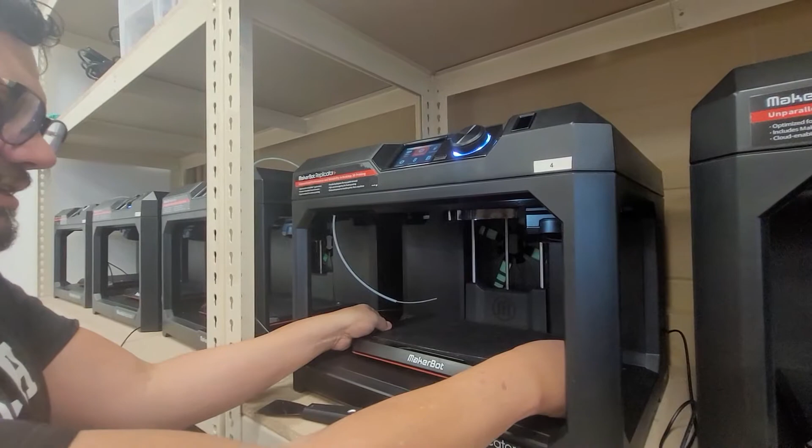This is the build plate for the MakerBot. It's pretty neat how you can just detach it, making it easy to bring out to a different surface and clean out once the print is finished. Let's review that process.

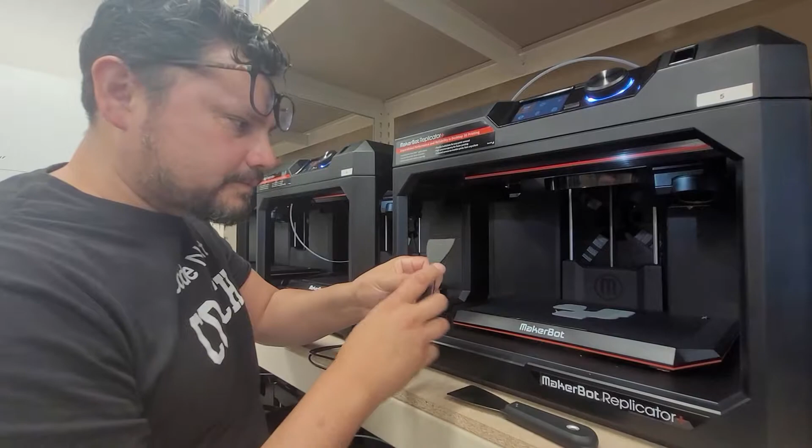As you can see, there's already a failed print here that we're going to remove. We use spatulas, there are different kinds you can use, and it's a little bit of wiggling that's involved. If the plastic one doesn't give, use the metallic one and nudge it up a bit, and once you get one corner up, it's easy to get the rest off.

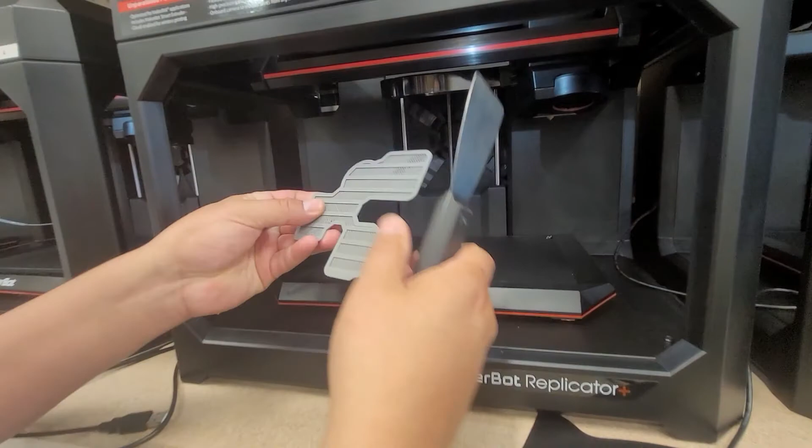There are always little artifacts left, so make sure those are clean. This is an important step to do before the next person can print. You want to always clean off your plate and get it ready.

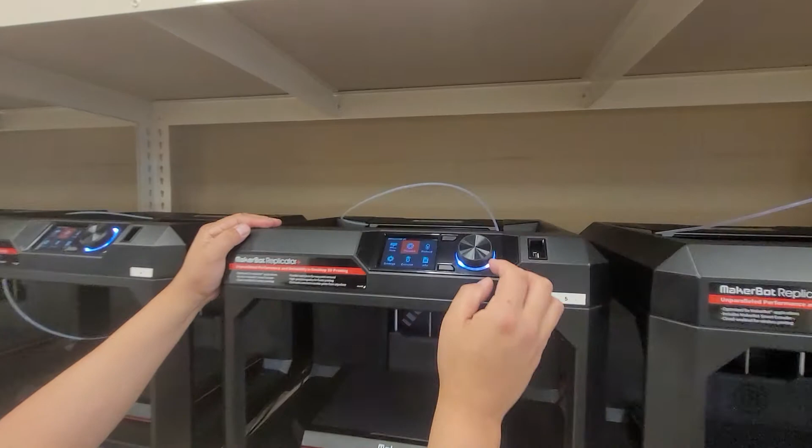Now let's remove the filament and replace it with a different roll. Up here, if it's on, you can see one of the options is filament. I select that and press the wheel. Since there's already material in there and it's pretty much stuck inside, I click unload filament.

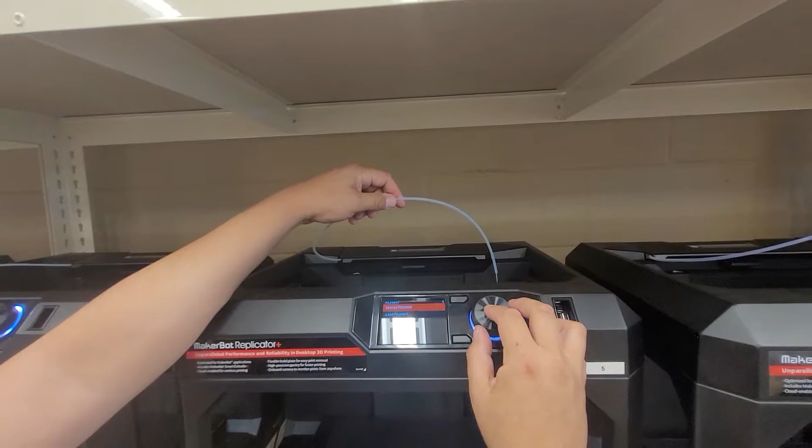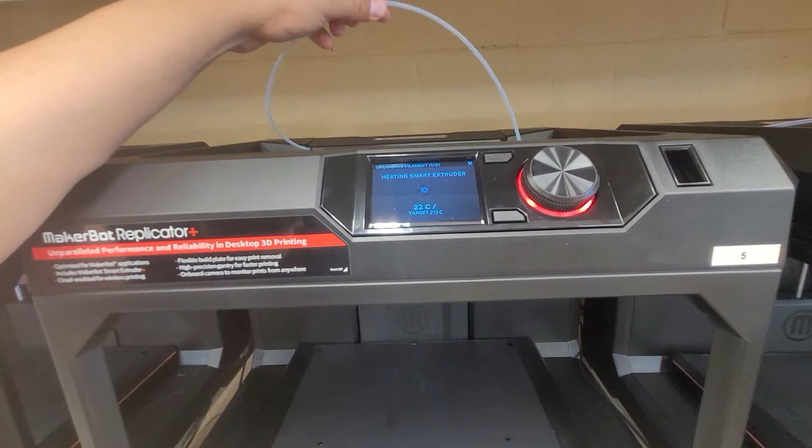It's going to hit the target temperature of 215 Celsius. Right now it's rising to that point, and once it gets there, I'll be able to remove it, unspool it, and retract it. There's a motor inside that handles that for us, so don't worry about it.

The material we're using is PLA, a non-toxic polymer that basically all the machines here should be using. PLA is pretty standard, one of the cheaper ones, and it's good for classrooms, so stick with that one.

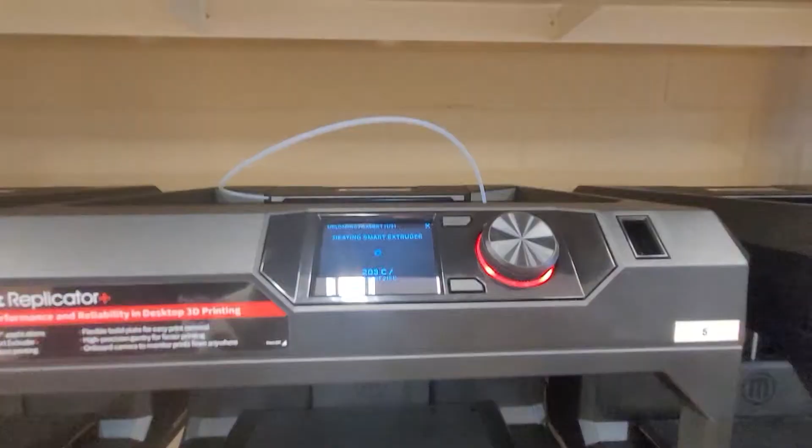Okay, it looks like it's getting ready to hit the target. It'll soon start retracting on its own. And there we go, just like that — it just spits it out. It's hot enough to remove.

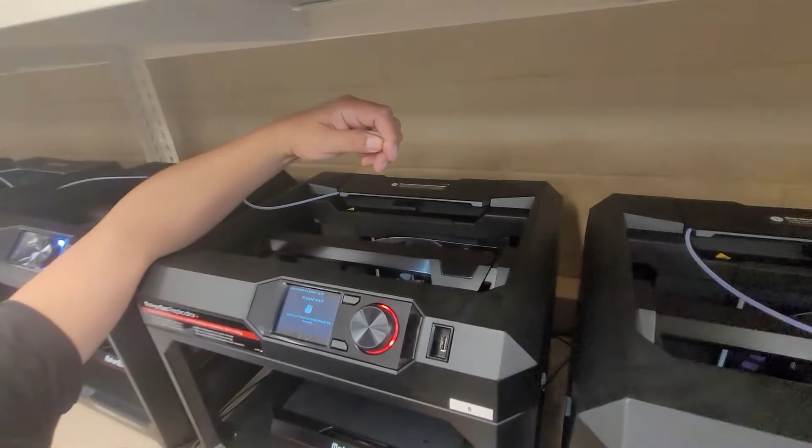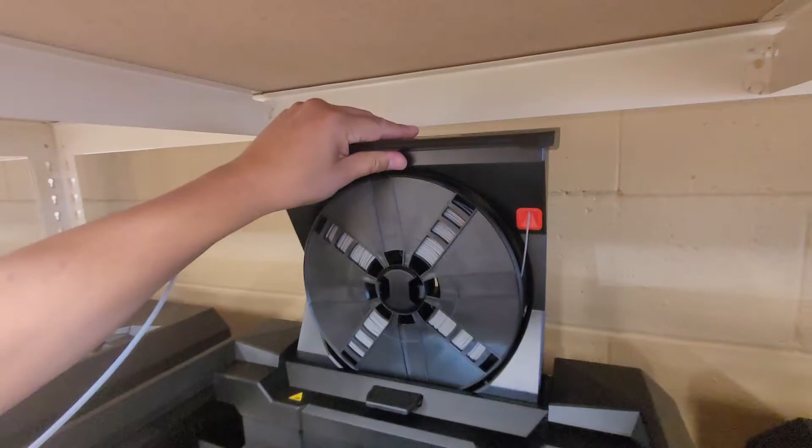Very easily comes out. The next stage is to actually change the spool. Back here is where it lives. Just take this thing down and hold it all the way until it clicks in place, because if you don't, it might fall down, make a lot of noise, and could break.

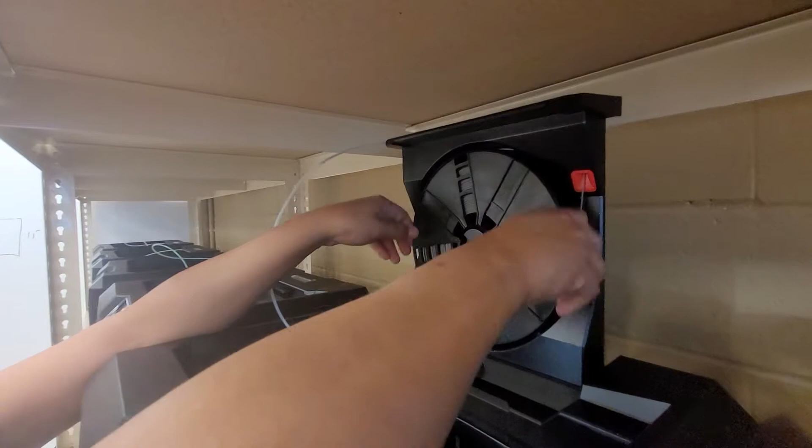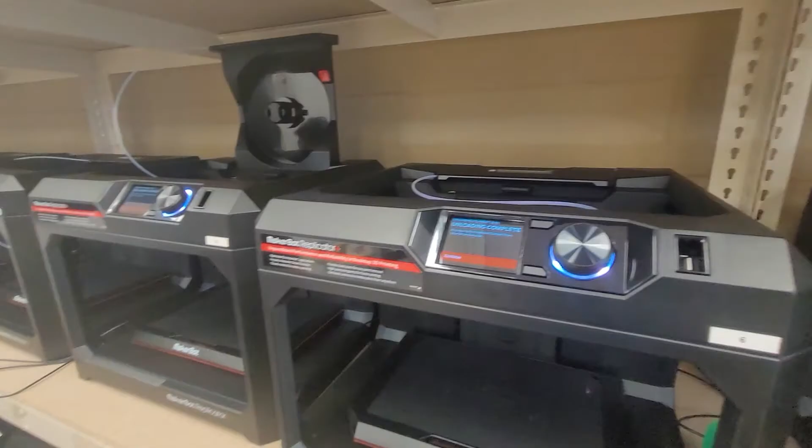Now you can basically spool it back like this and remove it — and maybe pick a different color. Where do we have colors? Okay, once you get it ready to spool, you're just going to feed it through here.

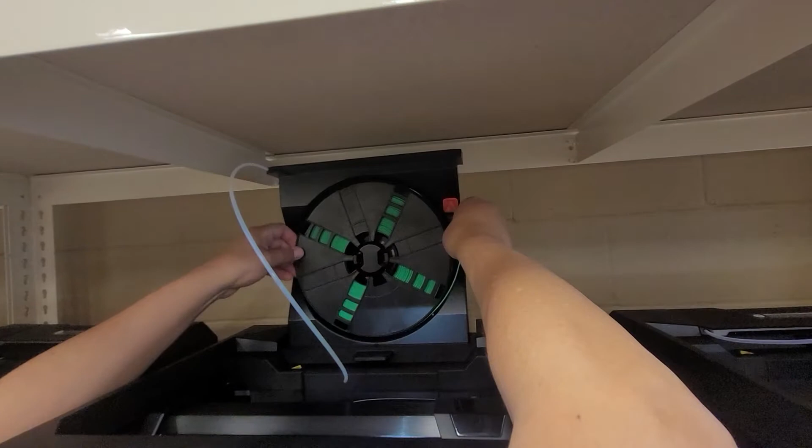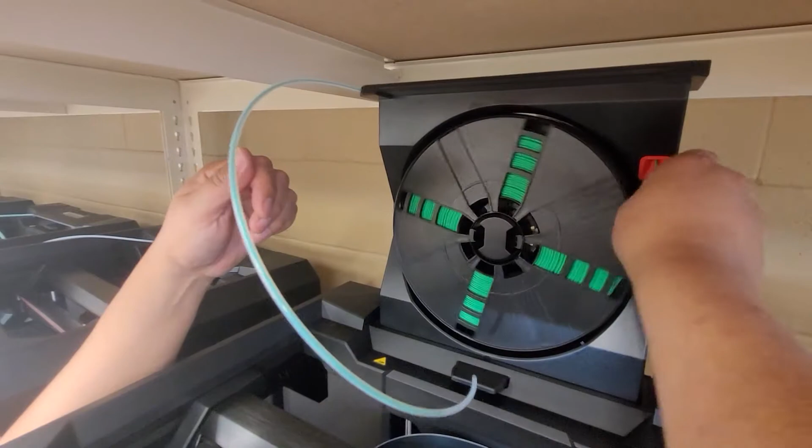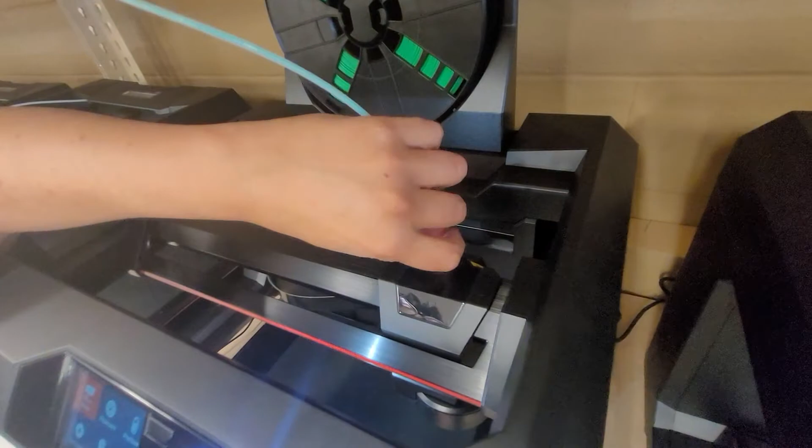So it comes out through this tube. Okay, that's what you want — a little tail that you can insert over here. Okay, just like that. Now it's not really spooled in there.

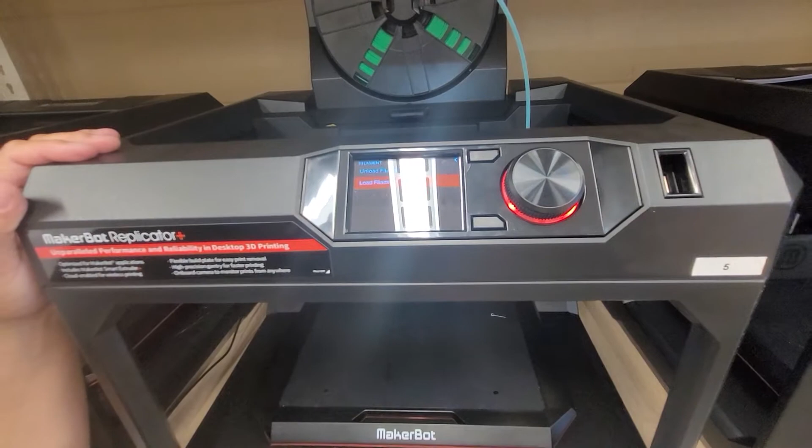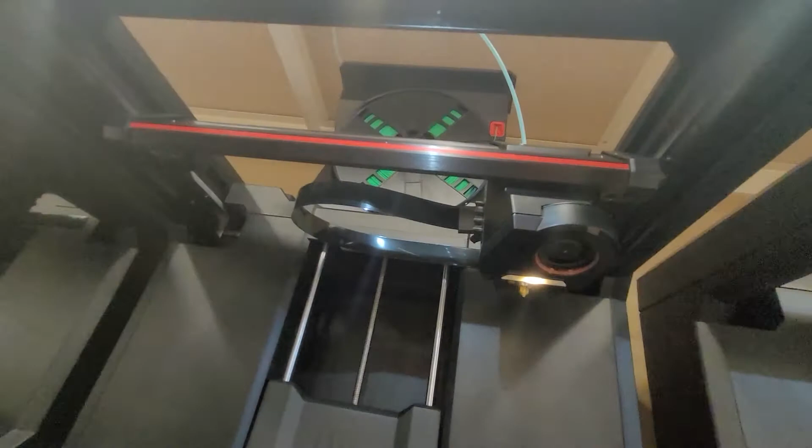We've got to go back to filament and click load. Again, it goes through the same song and dance, heats up to the target, and then starts spooling it through. At the end, you'll see material ooze out of there — that's when you know the filament has been successfully inserted and spooled.

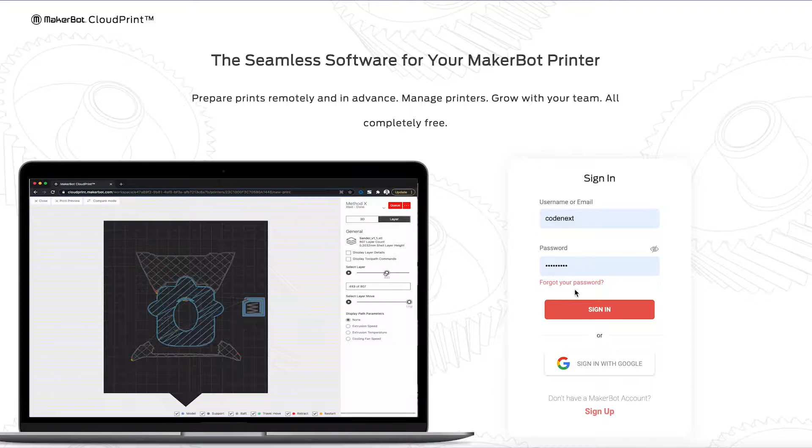We use MakerBot Cloud Print to manage our 3D printers, send jobs to them, and monitor the workspace. So we're going to sign in here with MakerBot. Okay, so this is the workspace, and here are all the printers that have been added to it.

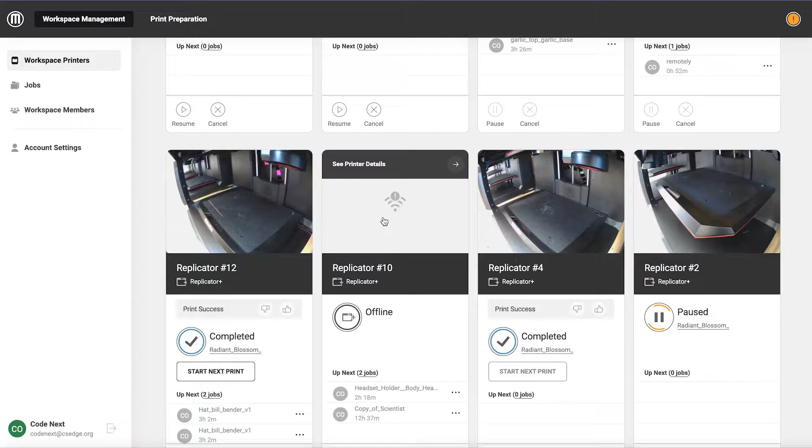There are some warnings here, so you'll see those if there are issues. All the different printers are listed here with their current status, and you see an image. This one appears to be offline. Some have had other issues, like out of material or filament slips. You can also see the ones that are finished.

Right now, all the build plates are clear, so there's nothing to actually see on them. But once a job is completed, you should approve it or say it was successful, and then it'll know it's been cleared from the queue. This one could start its next job — that could be done like that.

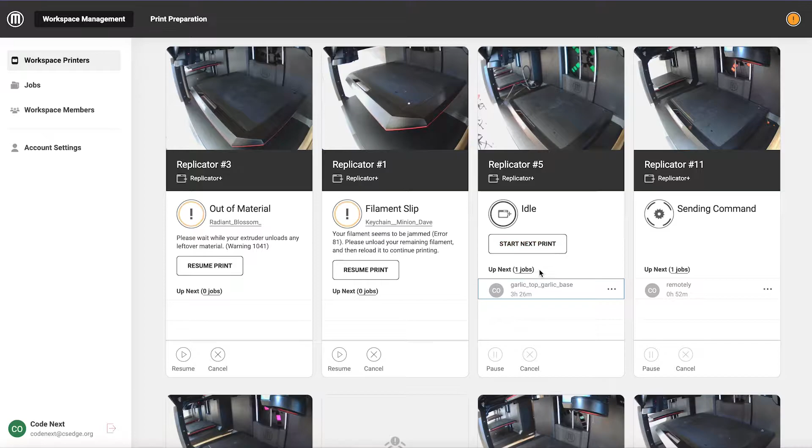And start print, and it'll begin warming up and do its thing. This is just a quick way to see what's happening throughout all the printers, and it also allows you to manage some of the members — who's going to have access to this dashboard.

You can add members by email, and you can see previous jobs and a few other things.

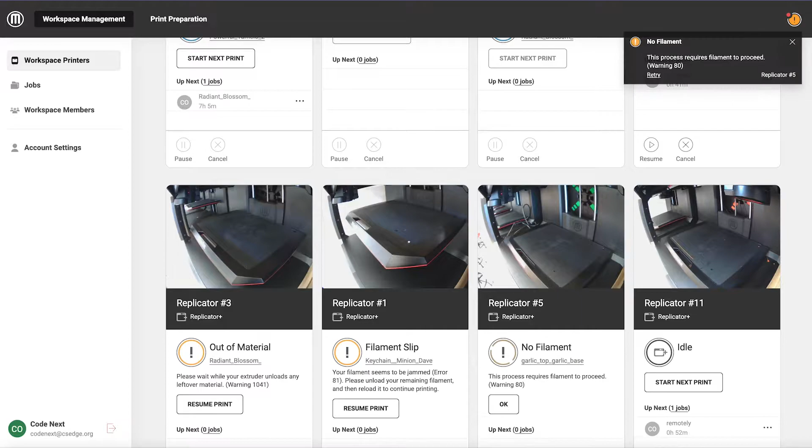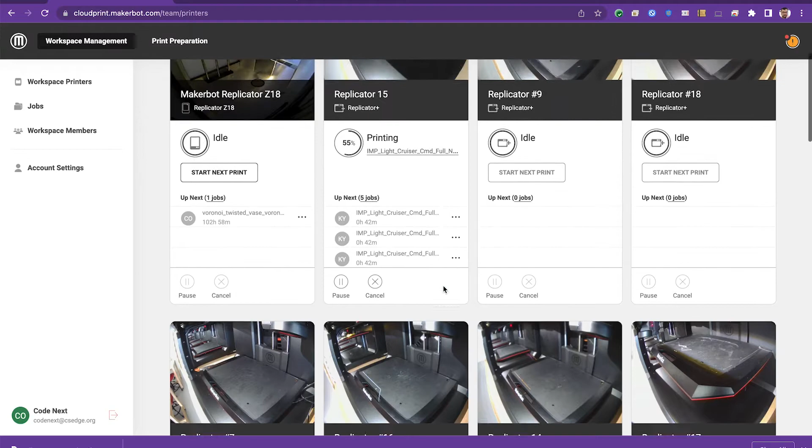Okay, next let's add a print job to one of these printers. That means we have to find the 3D model file to send, slice it up, put in all the settings, and get it ready to print. Then we can start the print job directly from this Cloud Print interface.

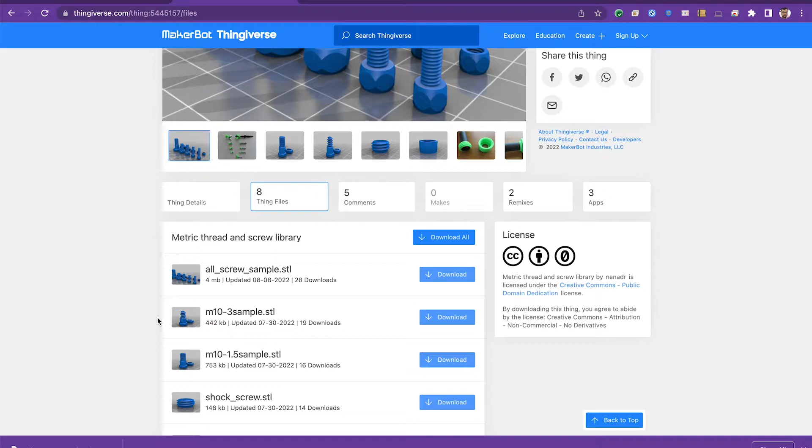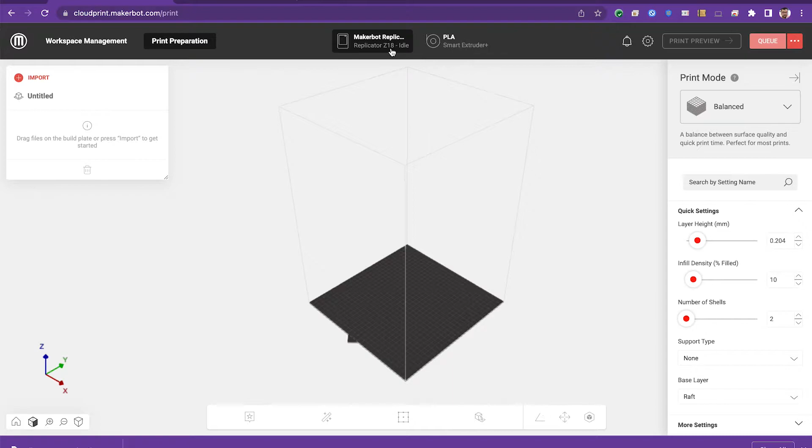So let's go back to Cloud Print. For this, we have to enter print preparation mode, up here at the top. Selecting that takes us to this screen with one of the printers. Here at the top, you can see which printer you have selected, or which has been selected for you. You can click that and select a number of other printers, and it tells you their status.

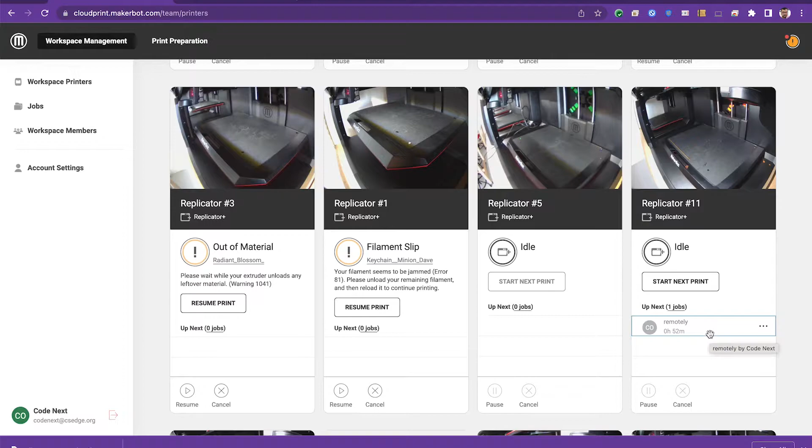So if I want to pick number 12, I'll choose that one. It's typically good to first go to this screen and find a printer that's actually ready to receive another print, and doesn't have an error or isn't in the middle of a print. This one — let's see, 11 — seems to be idle. It does have a print job in the queue, but we can ignore that. So we could send it to that one.

We could send it to this one by approving this print job. We can send it to number 7 as well, and then skip this one. But number 16 seems to be idle — there are no upcoming print jobs. I think it's the color black, which is fine. I'll use that one.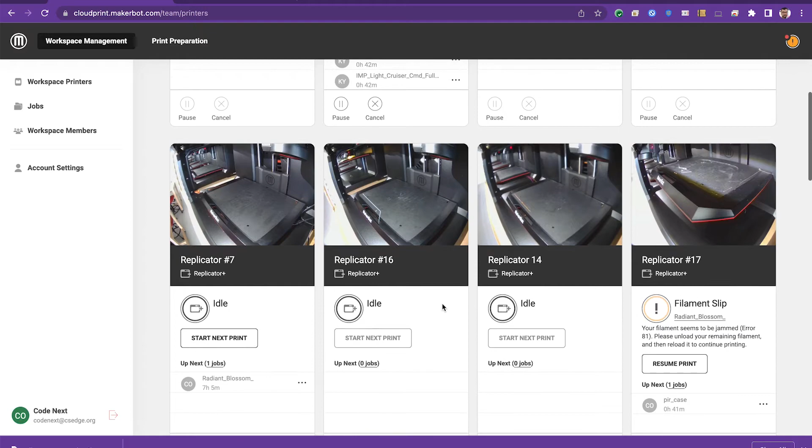So in this interface, I'm going to select Replicator 16, and it'll just change the outline because that other one was a different size. Now all we have to do is import the file. We have a file to select from the downloads folder, the STL. It imports it — now this is the scale that it was saved at.

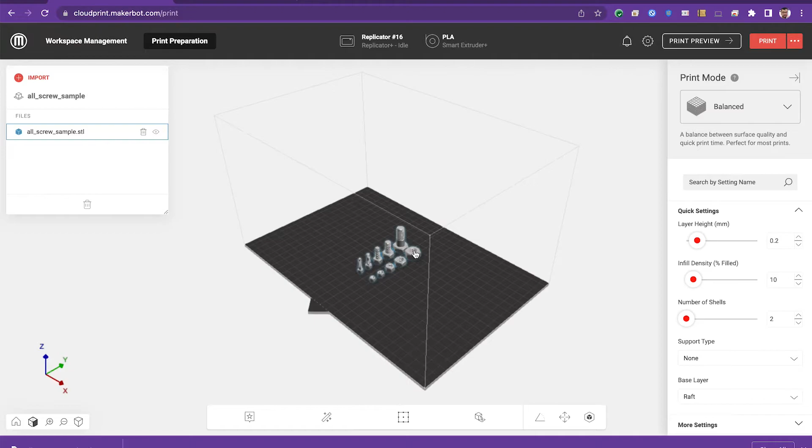So you have the option to increase the scale of this. But with certain pieces like screws and bolts, I'm a little reluctant to scale it, since the threading has to match, and the designer of this model probably went to great lengths to make sure that it worked. So I'm not going to scale this.

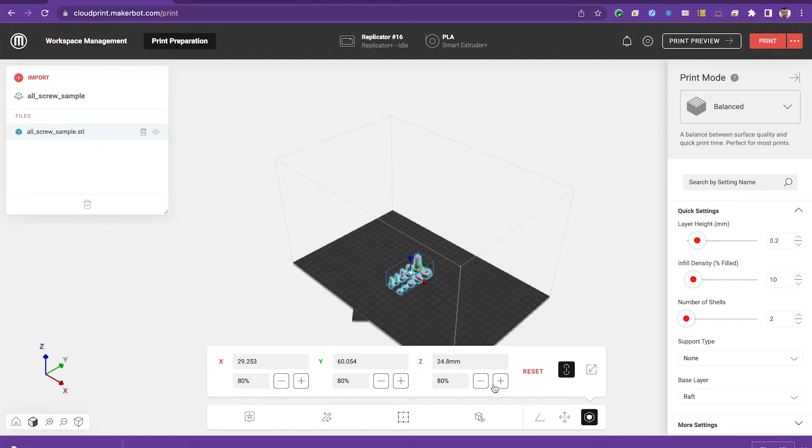But if you were going to scale it, you could go to this section here, to the button that says scale, and increase or decrease it by percentages. That decreased it, and all of them followed suit because they're linked — uniform scale. I'm going to undo that with Command Z, and just print it as is.

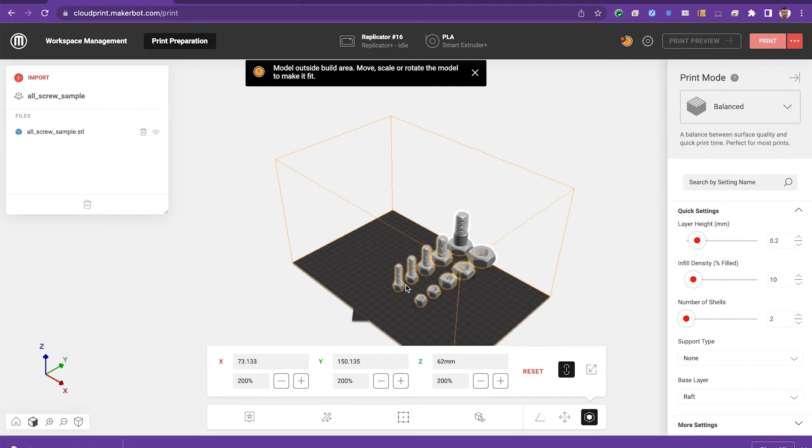If for some reason you scale them and a model happens to be too large for the build plate, it will immediately turn into a yellow outline, letting you know it's outside the print area. I'm going to move it over here — that would be corrected. It's a little slow, but as I mentioned, I'm not trying to scale this. I'm just going to undo all of that.

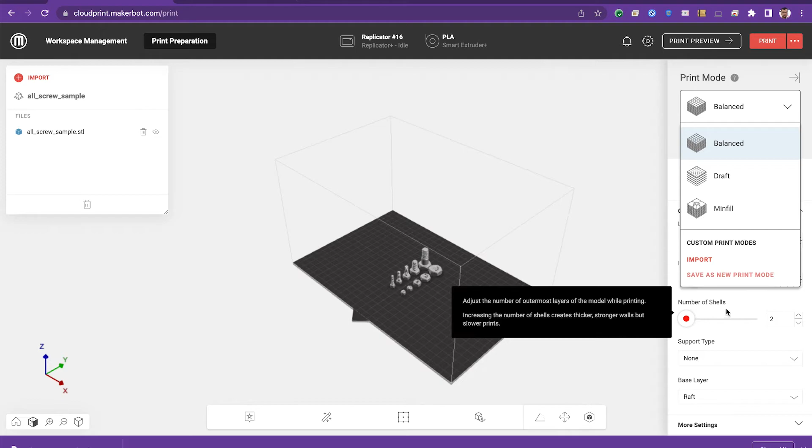And now we can print it. On this panel, we have several things to take notice of. Right now we are using a balanced print, which is fine. The good thing about Cloud Print is that it gives you tooltips for all of these things, so you can quickly see what a particular setting might be adjusting. A good balanced print, or draft if you're trying to do a quick one to see if it's going to work, more for prototyping. And then this is for really, really fast prints that don't have to be durable, just for temporary usage. So here we have some important settings.

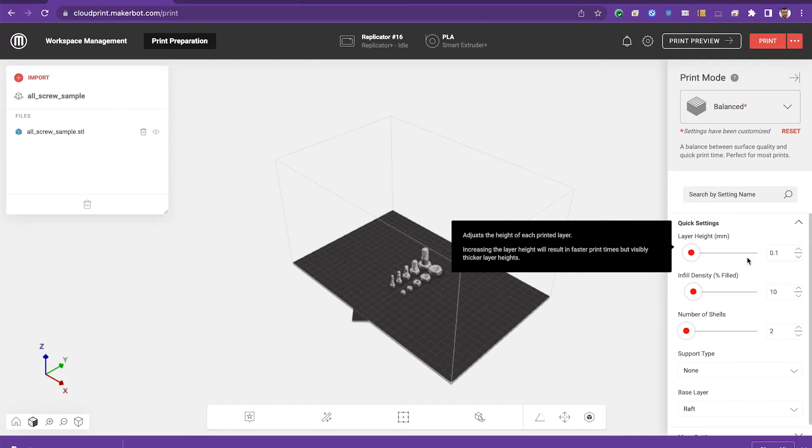This is another way to change the quality. The layer height basically determines how fine each layer will be. The smaller this number in millimeters, the more layers it's going to make, and each one will be thinner. So you can expect a cleaner, more neat print. However, it does increase the time because it's got to go around and around more times.

You can also adjust the infill of a shape. In this case, these should be pretty solid. I don't want them to be hollow, so I could move it up and down, but I'm going to just leave it as is. And then also the number of shells - it tells you that having a thicker wall might be something you desire, or maybe it's not. And the more material you use, the more layers you have, the more density. Obviously, all of those things are going to increase the time for the print to be completed.

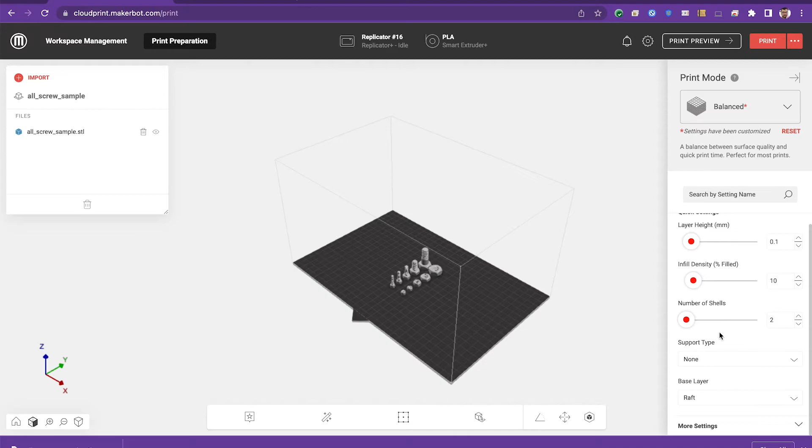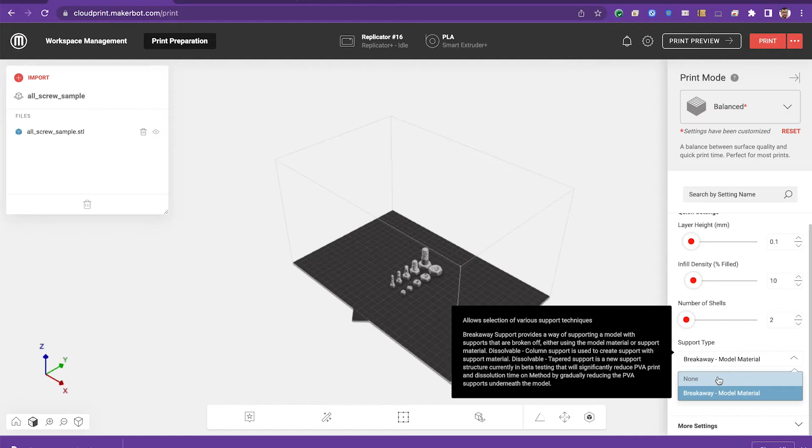Certain models will require support when there's an overhang, more than a 45-degree angle on any part of the model. It's a good idea to add breakaway support material, which basically provides a scaffolding for parts to be printed upon. Otherwise, you may have some print that just kind of dangles in the air, doesn't adhere to anything, and you end up having a print that doesn't actually work. So having this is good for when you have an overhang. However, in this case, I don't anticipate that with these shapes. If you zoom in here, you can see that there is really no overhang going on.

And then the base layer - the default is to use a raft, which is a layer that goes beneath the print. It's a good place for the thing to adhere to, and it's usually recommended. However, you can remove the raft if you are trying to save time as well. There are more settings here, but these are some of the basic ones.

So let's just reset everything here. Yeah, balanced. And let's just do the regular 0.2, which is a kind of a rough setting, but it'll still work. Okay, and then we select print.

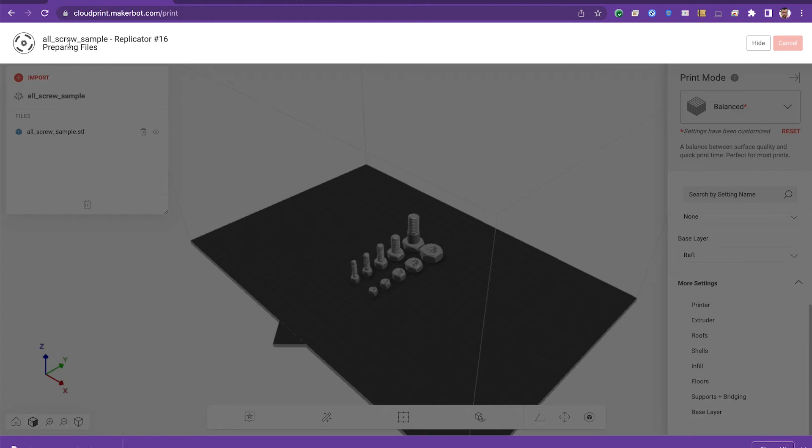Slicing basically means that a file needs to be prepared first, and then it gets sliced. When you're slicing a file, it basically converts the 3D model information, which is basically dots and points in space, to instructions for the machine on how to move, how to extrude material, what temperature to set. So it's basically instructions for the actual 3D printer, translating the model's shape, size, orientation, and everything. But you don't have to worry about any of that - you just have to wait for it to slice.

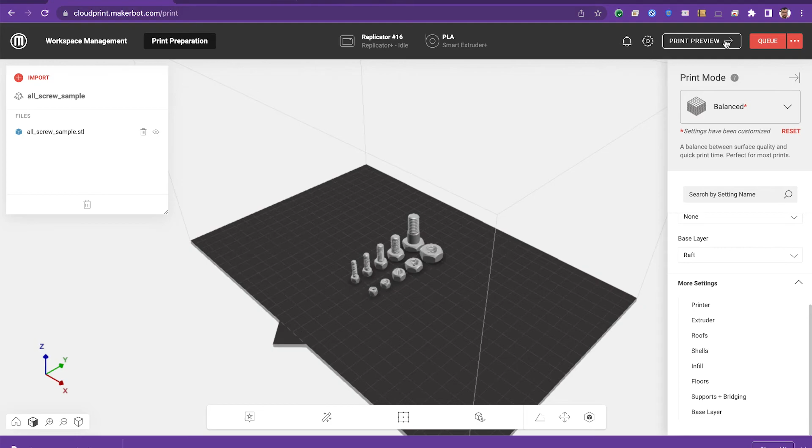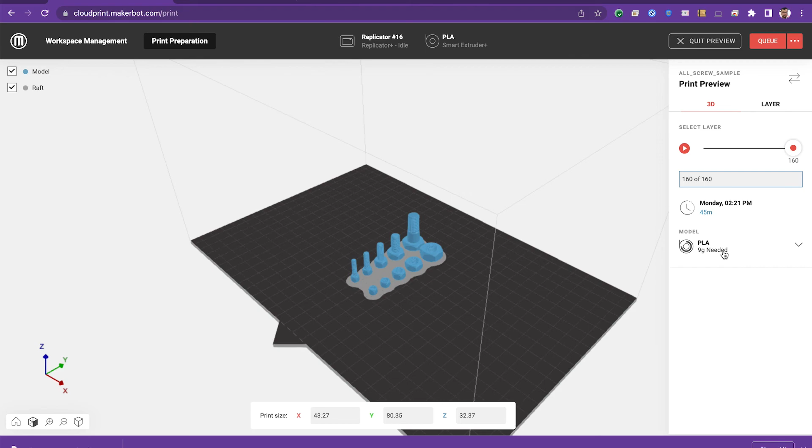You can see there's a queue. You can also look at the print preview here. Here is a view of the print job step by step, layer by layer. So this is going to take about 160 layers to complete, and it starts with a very basic raft. There's also an estimated time for completion, 45 minutes, and how much material is estimated to be consumed - 9 grams of PLA from the spool we've inserted, if you keep track of that.

Okay, so it's in the queue right now. Let's go to the workspace management, and it says it wants me to confirm that Replicator 16 is ready to go. So this is the last chance to see if there is something else still on the build plate. I can confirm that it's clear, so I'm going to start the print. Replicator 16 basically starts heating up, sends the data to the machine, and will begin printing.